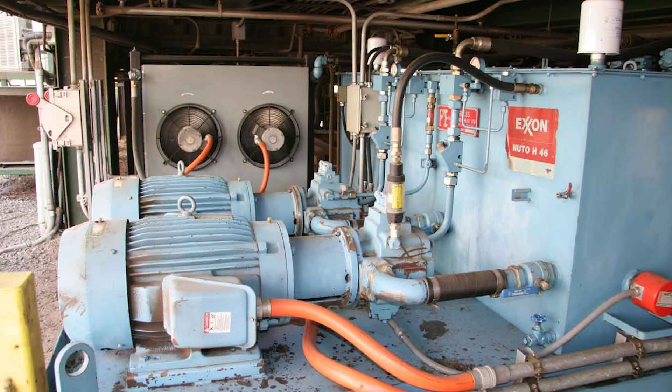Last time we collected all the information we needed and headed out to the plant. So we're back, and we've collected the information we talked about. Let's go through what we found. You see the hydraulic unit here, and you also see the collected information, let's go through it.

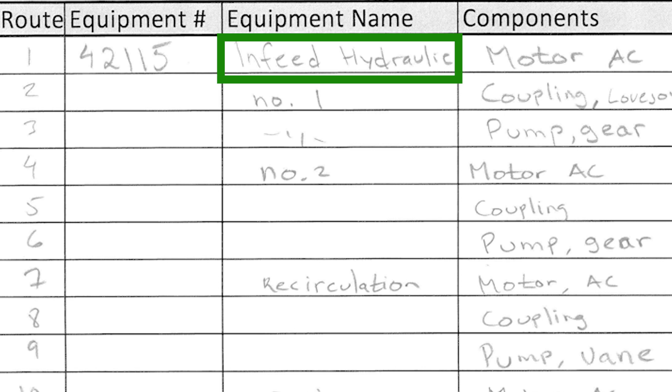You see the unit here in front has a motor. The first row has the equipment number, and it's route number 1. It's the first thing I want to check, and it's called in-feed hydraulic. I have to look that up in the CMMS since it wasn't labeled in the field, I just had the number.

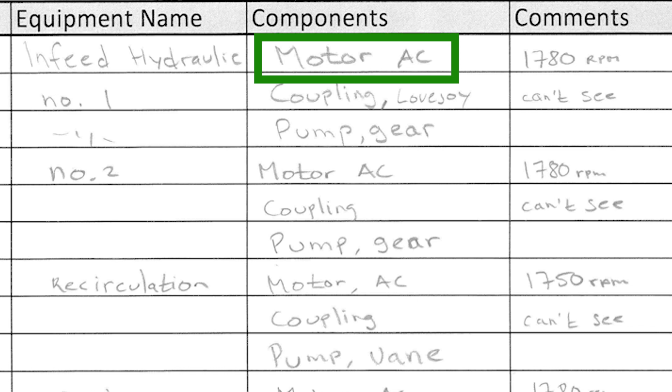I went out to look, and the first thing I get to is the motor AC. So I write down, in the components, motor AC. I take down the RPM because I want to inspect this motor, and with my stroboscope I can check the air fins and the coupling. This one I can't get to, but if I could get to the coupling, I can just set my stroboscope right there at 1780. I don't have to play around with it, saves some time.

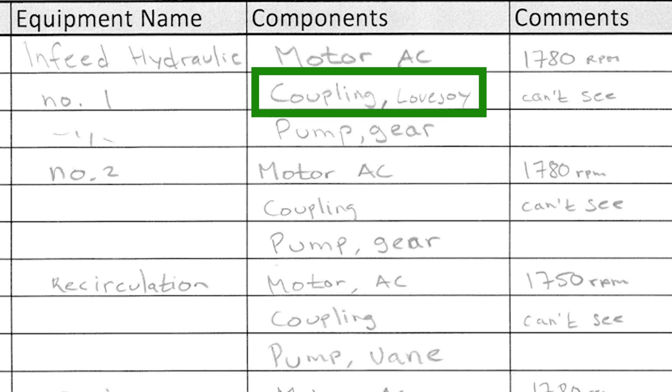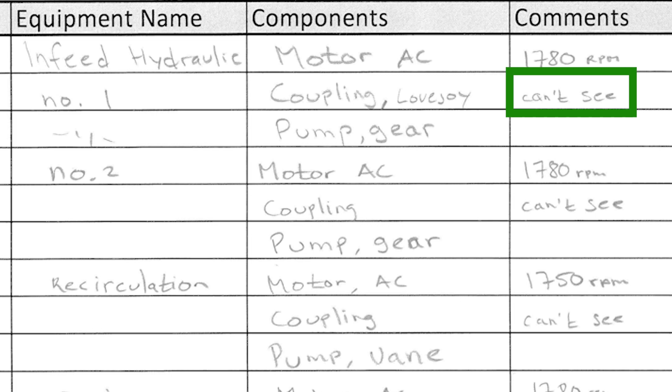The next thing I see is a coupling. We looked at it with the stroboscope. We can kind of peek in there a little bit, and it looks like a Lovejoy coupling in there. But again, the comment is I can't see it, I can't really inspect that because it's completely covered by the guard. So I say can't see it, which means I have two options.

What am I going to do for PM? Well, I'd like to take a stroboscope and look at it while it's running. That would be the most efficient way, but somebody has covered this completely. So I'm probably going to have to do that on the shutdown, or I'm going to have to say I'm just going to operate this to breakdown. That's another way to do it. So we need to decide how to handle that on the PM later on.

For now, I just write down there's a coupling, Lovejoy, and then there's a pump. I wasn't 100% sure, but we're guessing that's a gear pump. We'll go look at it in the CMMS and see if that information is there. Typically it's not, it just typically says hydraulic pump.

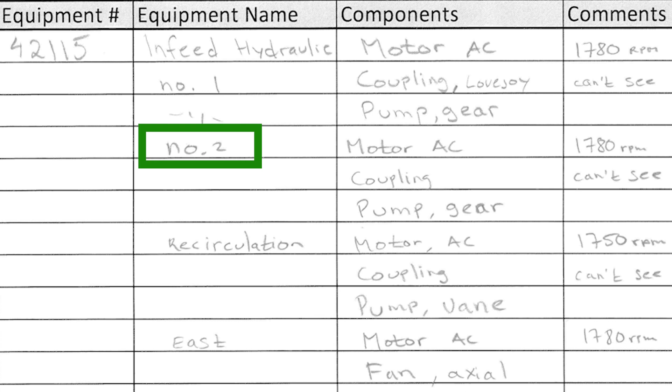Then you see on the sheet we have number 2 pump, that's the one behind it, the same thing: motor, coupling, and pump. And then there's another recirculation unit. You don't see it, but there's actually a motor, coupling, and pump in between the two motors. So we wrote those down. Now we're up to 9 components.

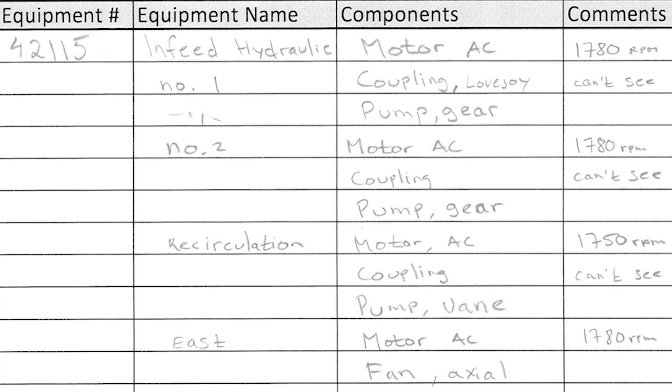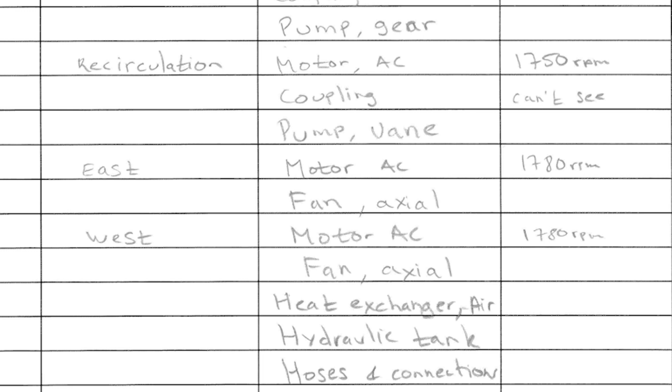Then you see that little funky thing in the back. It's a bit unusual, but it's kind of an air-cooled heat exchanger, because the hydraulic oil goes in there and is cooled with those two fans in the heat exchanger. So we have 2 motors, as you see: an east motor with a fan, and a west motor with a fan, and then we have the actual heat exchanger itself.

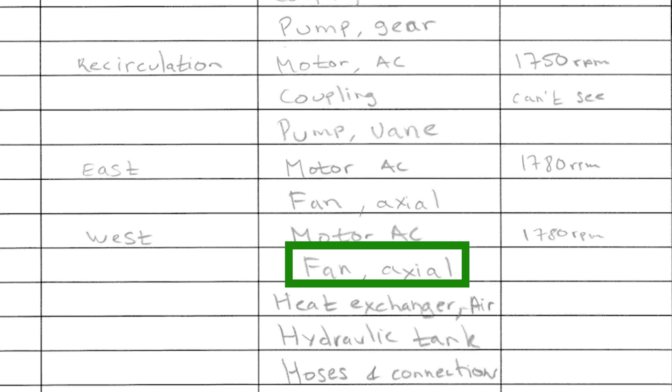Then on top of this, we have hoses and connections. I just put that as a component because there's a bunch of them, but I'm going to clump them all together. And then I have the hydraulic tank.

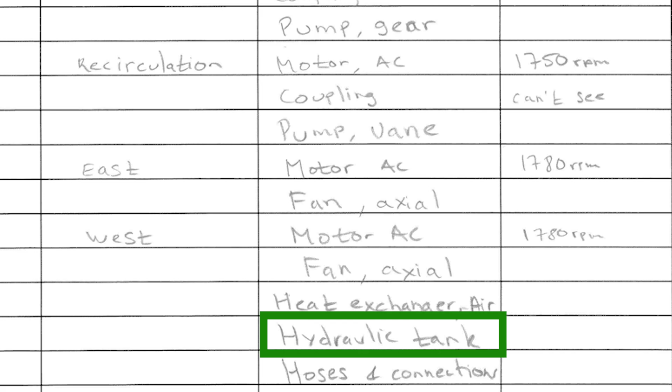I've broken this into 16 different components, and I've covered this hydraulic unit. Now I have good information, and it's absolutely critical that we go out in the field and look at this piece of equipment. I see people trying to write the PMs from a desk just from the information in the CMMS, and that's typically a mistake, because we don't know if the couplings are covered like we saw, we don't know the RPM of the motors typically, and we probably don't even know which type of coupling or pump it is. So there's information we need to go out and get to plan this PM. That's why I like to write it down on these clipboards, so I get the information in the order I'd like to have it.

Let's talk about component. So what is a component? Well, here at IDCON we've used the word component, and it could be argued if this is the right word or not, but it's something that's highly repetitive for preventive maintenance purposes. For example, that motor has several components or machine elements inside it, but it's a highly repetitive unit that we see a lot in paper mills, refineries, mines, whatever it is. We see AC motors, and it's a unit that is reoccurring.

So if I write a PM for that AC motor, what do I need to do on the run? What do I need to do on a shutdown, lubrication? We can have a standard, and I can just apply it over and over again. In some cases, we may have to do some research - that motor is specific, it's different RPM, we need to inspect it more often, or it can be in a strange location, very wet or very hot. So it may change things.

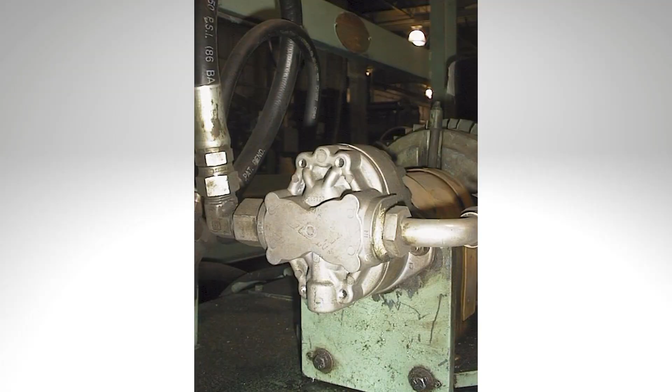But in general, there's a number of inspections we always want to do to a motor, and we can kind of put them together. Same thing with a coupling - if I can see the coupling, I want to take a stroboscope and look at it. If I can't, I have to make a decision either to modify the guard, or do typically a shutdown inspection and take time to pull it apart and look at it, or just let it run to breakdown. Same thing with that gear pump, it's very highly repetitive. The hydraulic tank, there's breathers and filters on the tank, so we can get that as a standard.

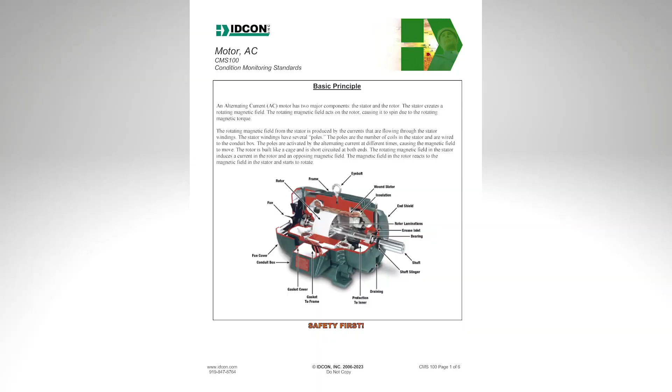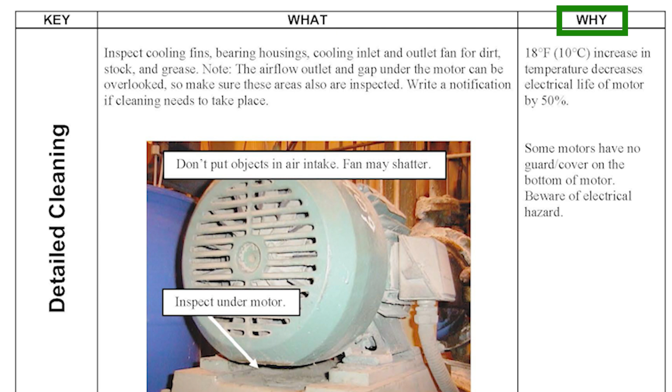So what we've done here at IDCON - you'll see here a little advertising - is our book, Condition Monitoring Standards. We probably have about 200 of these, but we're selling right now about 100 that we have. For the AC motor, for example, there's a short description of how it works, then you'll see the inspections on the left-hand side, the keywords as a reminder, and those keywords go into the route or the PM, so people remember what to look for - a little checklist. Then there's a description of how to inspect it, and why you inspect it. We've done this for our PM projects where we do it as a service. Our guys probably have 200 or 250 of these standard components for different industries, but we're selling the 100. We have the document, which is a teaching document, but we also have the instructions that go into the CMMS, or the route software, whatever you use.

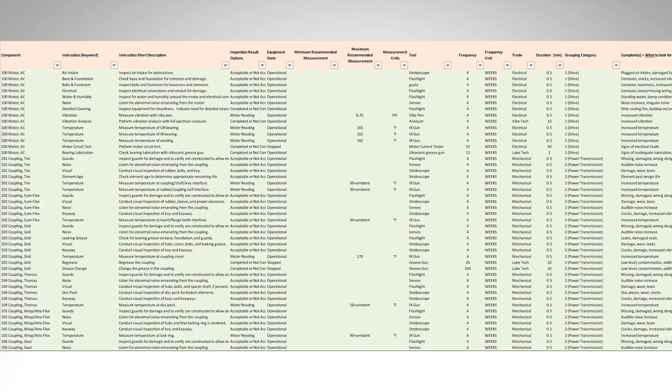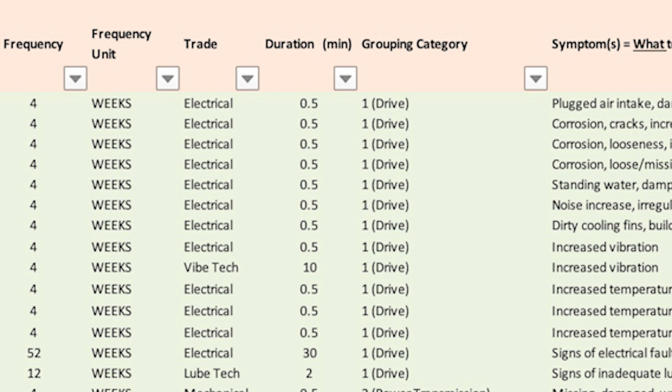I suggest you create a database where you have these standard components and basically say, motor AC, what do I typically do on the run, what do I typically do on the shutdown, and you have a basis for applying to all your equipment. Then you can refine it a little bit depending on where that motor is, if there's something different with it, or the pump, if there's something special with that pump. But that's what we're doing - we've been out in the field, and we have our components, and that's it for this time.